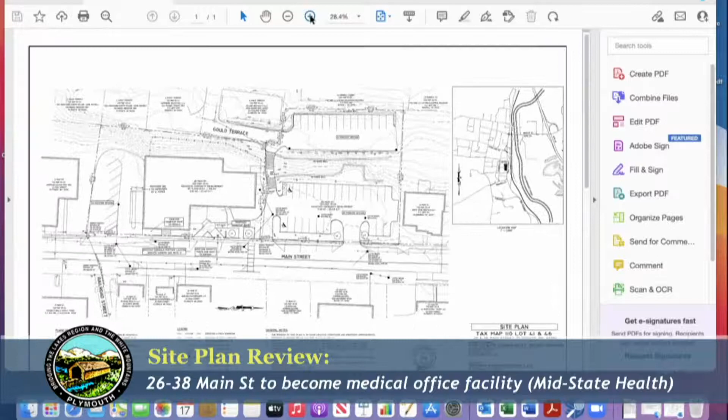All right, so here we have, can everybody see my screen? Yes, all right, great. So here's the existing bank facility. Here, what we are proposing, and we'll jump over to the architectural plans in a moment. There's an existing main entrance here, which comes off the sidewalk off of Main Street, that you come into the building and flow throughout the building here.

The site is accommodated with 25 parking spaces, again, off of Main Street. There is an upper lot with 14 parking spaces. There is some drainage issues coming from Highland Street up above, which we'll address in the presentation in a bit. So those 14 parking spaces plus the 25 would serve for both faculty and those patrons visiting the facility.

This is really an existing conditions plan. We're not proposing any changes other than we are aware that you guys will be doing some work. Along Main Street, from our initial conversations with the town, you guys will be introducing some new curbing and updating the sidewalks along Main Street.

To the side of the building, next to the neighboring property, we have another 10 parking spaces. This is where that existing bank teller window is - it's currently a roof structure with supporting building underneath. So we will be infilling that, and we're proposing 2 new 3-yard dumpsters in back of that, screened from Main Street, as well as fenced outside.

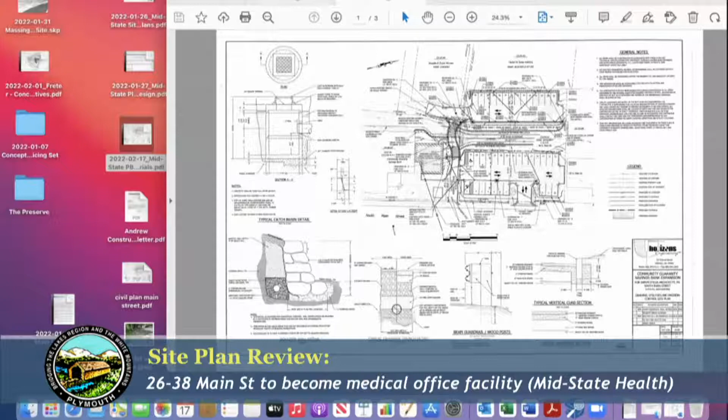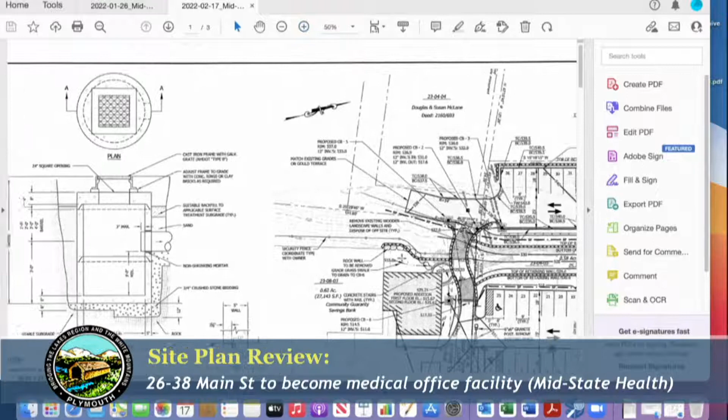So that's really the exterior of the building. We do have an existing plan showing all of the drainage that was constructed in 2006. This engineering was done by Horizons Engineering. It does show all of the drainage on the upper end of the site, how that flows down towards Main Street, and the drainage plan for the lower parking lot here.

Any questions on the site plan? Anyone? Mike, go ahead. Mike Ahern here - you said you're proposing to keep the 10 spaces on the south end of the building?

Yes, these 10 spaces over here would be kept. There is an existing ramp here that comes into the building. So the plan would be, this would be faculty and staff parking. They would come in, up this ramp, an ADA ramp, and then into the building.

So you're probably aware that downtown Plymouth has severe limitations on parking for businesses, for the business owners and their employees. Do you anticipate having extra parking spaces that you might allow people to park in during the day or evening?

Yes, we are aware that there are significant parking issues in downtown. This plan, in the program here, we're not anticipating needing any on-street parking to accommodate the needs of the building. It'll all be accommodated with extra parking that would accommodate all of the needs of the building. We do know that there are some after-hours events, both with the theater down the road and the restaurants across the street, that do use some of that parking currently.

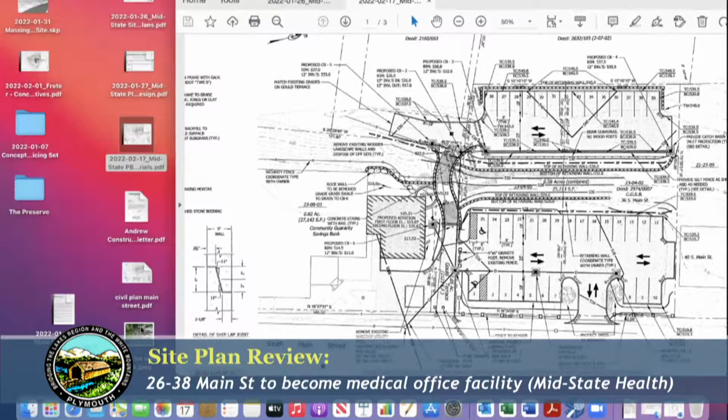As you'll see here, there is drainage on the upper portion of the parking lot. We've documented some issues, which I think will be solved with your upcoming renovations of Russell Street, but there is some flow happening, coming down across the property from the streets above and from the neighboring property, which has clogged up some of the drains. Midstate has cleared those.

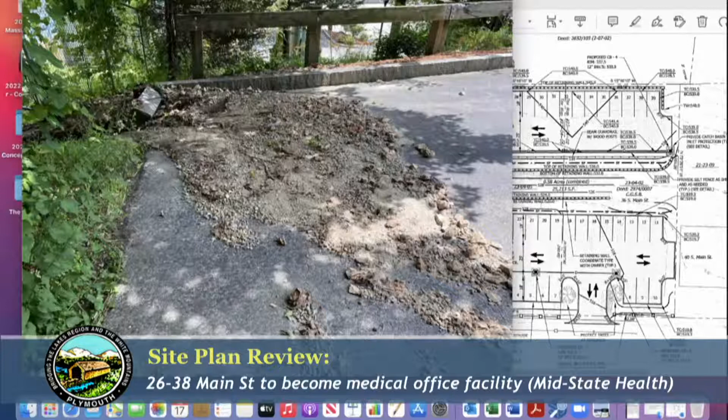The main water there is coming in kind of across the property from above, but I think all of these issues are going to be solved this summer with your upcoming construction on Russell Street. So we are aware of that, and we're looking forward to working with the town as you undertake your construction process to fix that.

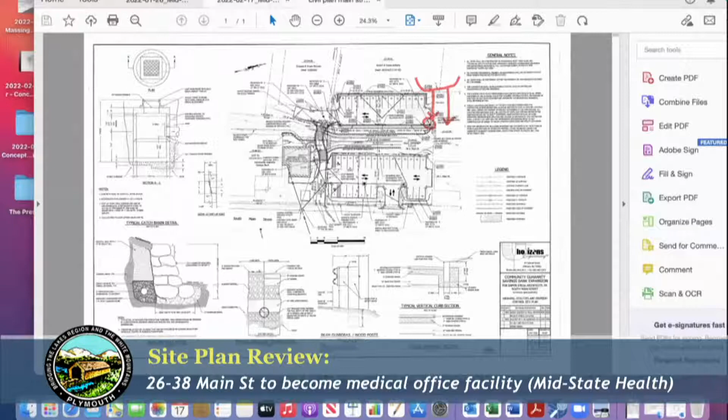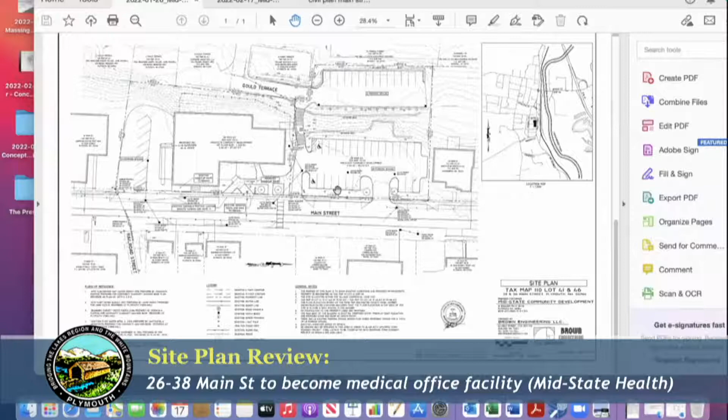So that's really kind of the main scope of the project. We know you're going to be doing some work here in the summer, so we're going to need to work with you on that. Overall, our parking needs are being met by the existing facility, and we're looking forward to being part of downtown. Thank you, Mr. Solomon.

Does the board have had time to review the plans and the comments from planning staff at this point? I did look over some of this material before the meeting, but that was whatever was sent to us. And as far as accepting the application, it does look, to me at least, complete.

Approving is another story, and from what was just said, a condition of approval - I don't know if it's on there or not - but we might talk about what's happening this summer and how that might be coordinated as a condition. But that's the next step, I suppose. It looks ready to accept, I think, though I'm not making a motion yet.

You want me to go over some of the history that we found? Sure, just before you do, I think for clarity - our file keeping takes some time to dig through and clean out and put everything in order to understand what's happened in the past. On the staff report dated February 11th, it outlines a few things.

The building was originally constructed in 1920, and there were a couple things over time. In 1988, a variance was granted to allow a sign in the front setback, so that sign is shown in that location - they're not proposing to change it. In 1995, a site plan approval was granted to add the drive-through canopy and the parking spaces on the south end. You should be aware there are actually two lots here.

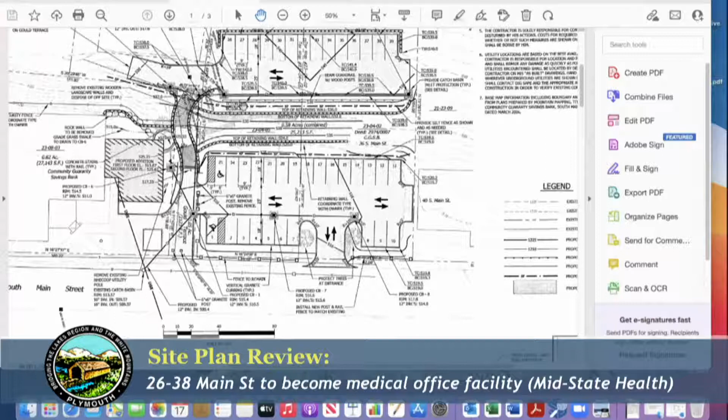You do have some drainage issues, which is why you'll be doing that fairly large infrastructure project this summer. We have this existing plan showing where the drainage piping goes, and a letter from Andrews president Buddy Crane, who has an outstanding reputation. He said it was built to the plans, and anything more than that would be on the town - I'm sure they did inspections during construction and certified the work was done properly. But we don't have records from the town proving that. We just have the letter and drawings from 2006 when the work was completed.

We have no as-built plan that I've been able to locate.

Mike, I would have one more comment about parking. On the south side of the building you've got 10 spots down the center of the parking, and we've got 2 entrances onto South Main Street. If you made the entrance in the center of that parking area, you could put 10 spaces on either side, if you could find a different spot for the dumpsters.

That building's drive-through is going to be enclosed as an addition, so they're not getting rid of that - it's going to be permanent, as mentioned earlier. We also don't have enough room - you'd need say 20 feet, then another 40 feet, then another 20 feet. Unfortunately we've got this property line here. The adjacent property owner's dumpsters are in this back corner, which is not on this property. And there's not enough depth here to accommodate 2 layers of parking and be able to get in and out.

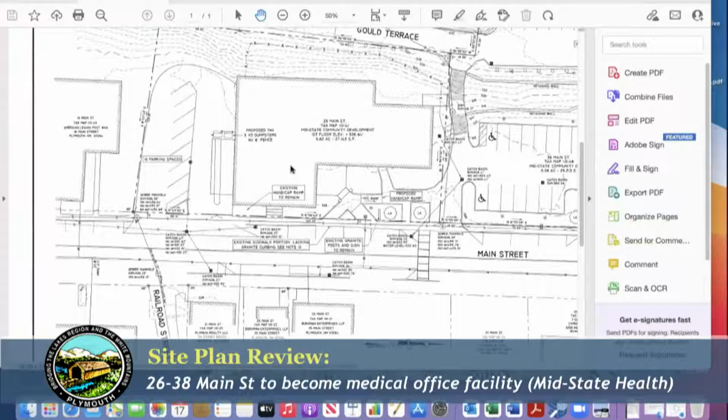Well, it seems like this is probably going to be continued, so we should maybe start to figure out a list of things that we want to have looked at, like parking, and a public hearing too, and then if you choose to continue the public hearing from that.

If we could just jump back - right now we have 49 parking spaces, which is going to provide parking for 12 staff members and 5 patrons, and that's really the need of this building and what we're asking to be approved tonight. We're really not looking to redesign the parking lot to accommodate the town's needs for other businesses and other property owners. We know we have a role as a community member - this is an asset to the south of Main Street. But for approval of this, we would look at the merits of this project and the parking requirements needed for this project.

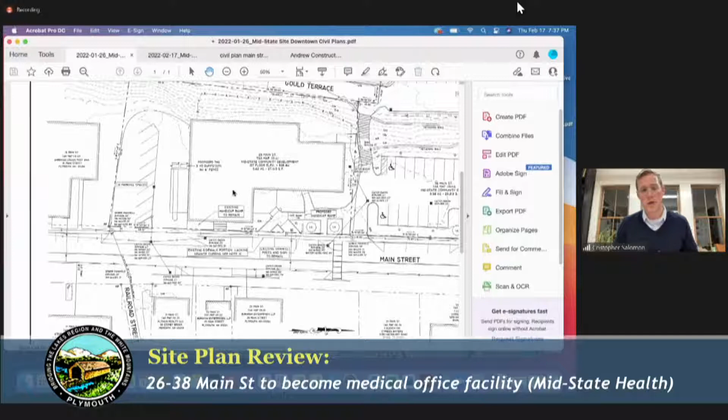I would like to open the public hearing and accept comments from the public. So it being 7:38, I will open the floor and ask any members of the public who'd like to speak to this for, against, or ask questions - this would be an appropriate time.

Frank Miller: I wholeheartedly support this application, and it would add to our business infrastructure on Main Street. With respect to the parking, that was Jim Heal's garage before it was the bank. That was the terminus of the road from Gould Terrace that came all the way down to Main Street. It was subsequently shut off, and stairs were put in. The bank granted that right-of-way, cutting off Gould Terrace over to the Plymouth Inn site, for the purpose of a possibility of making multi-level parking.

And we had that since 2000, and we've been trying to utilize the Plymouth Inn site, which is owned by this town, into a parking system.

We've just not been able to connect with the business community of the citizens. One issue, of course, is drainage. There are no drainage culverts on Russell Street. The only one is down by the end near Highland Street. So all that water that comes down the hill sheet drains down Plymouth Terrace and Gould Terrace.